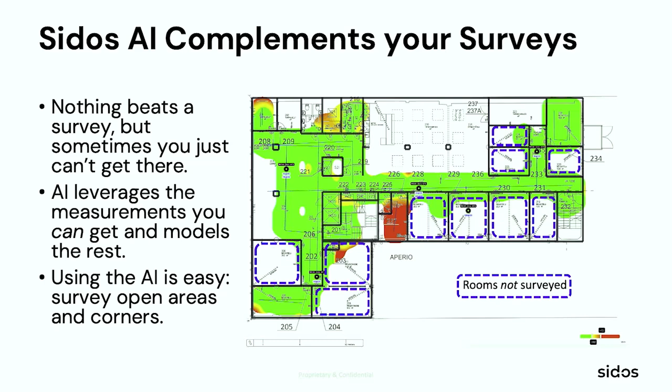So what I can do then, I run the Sidos AI on this, and this is what we'll get. So Sidos AI, it builds a digital model, and this is a machine learning term, as you may know, but it fits the measurements that I actually managed to get into this model. And once we have a model that we think is good enough, then we use that to estimate the rest.

And because this is not smoke and mirrors, what you could do, and it looks good, is just take the colorful heat maps and do blending and shading and stuff, but that doesn't match the real world. But what we do with Sidos AI is that we actually build a 3D model with real laws of physics, and then we use that to generate the heat maps.

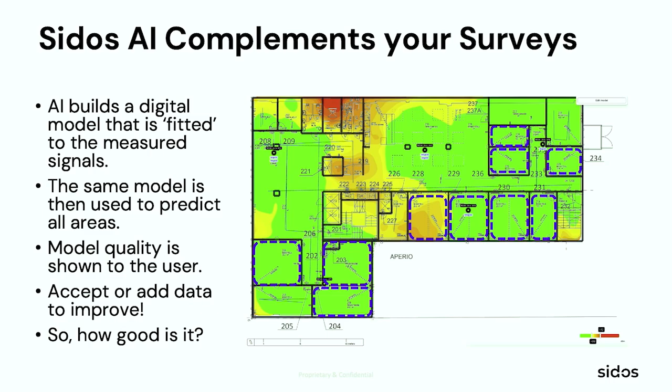And because we do that, it's more than colors. We give you a numeric metric, how good the model is. And you can look at that metric and decide for yourself if the model is good enough for your purposes. If it is, you move forward, you're done. Or if it's not, what you can do is you survey a little more. You give the AI more information, more data to work on, and the model gets better and better. So you can always give it a little more, okay?

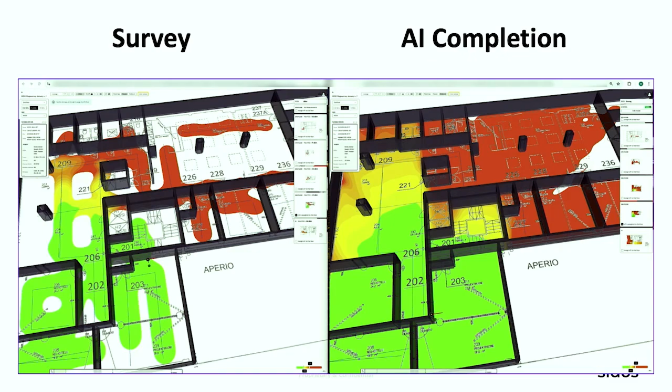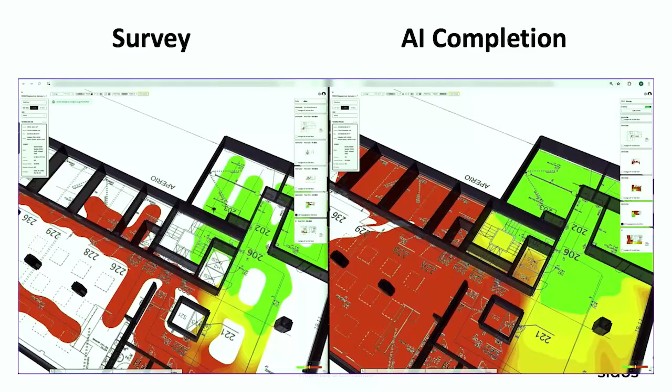Here's another view to it. So I selected one AP, and on the left, you see the full survey, and on the right, you see the AI completed survey. And colors match as they should if the model is good, like in this case it is. But the one on the right actually looks better. It's more representable. I could give it to my customer, and I surveyed much less. I did not enter those 10 rooms on the one on the right.

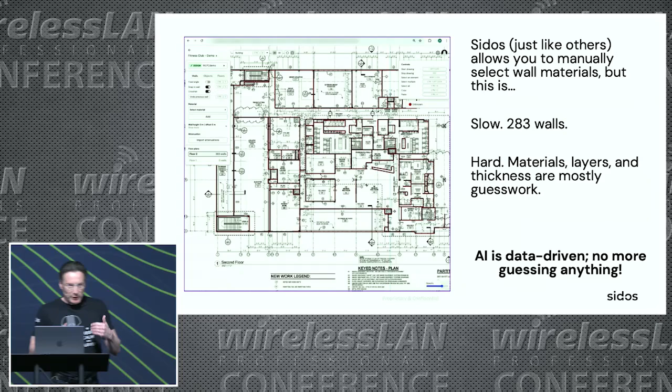What the AI can also do, because we have this model, is that it can improve your predictive designs by a lot. Okay? Let me show you this. So this is a Sidos predictive planner, and now the AI has configured the walls for me. So we do, just like everybody else in the tools industry, allow you to select the wall materials from a list. You can say, hey, this is drywall, cinder block, wood, glass, whatever.

But a couple things. One, there's 283 walls here, so I'm a little lazy. I wouldn't want to go select them one by one. And the other thing is, it's very difficult to do.

I can look at the wall, and I can tell it's probably drywall, but I don't know if it's one layer, two layers, is there something in between? So rather than manually selecting the materials, I just run the AI on it. And here's the list of materials if you wanted to select manually, but it's so much faster just to run the AI on this. So I've done a survey in this building, I just run it, and now we're done.

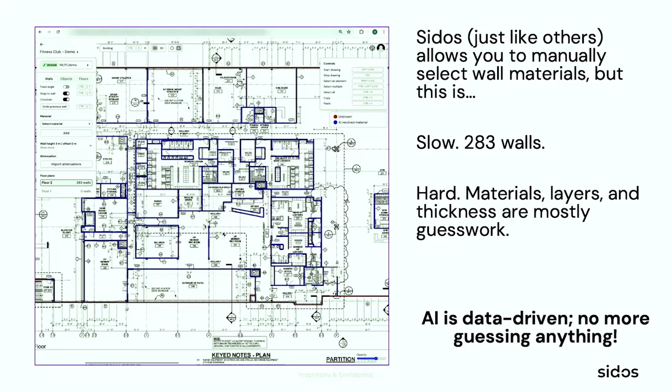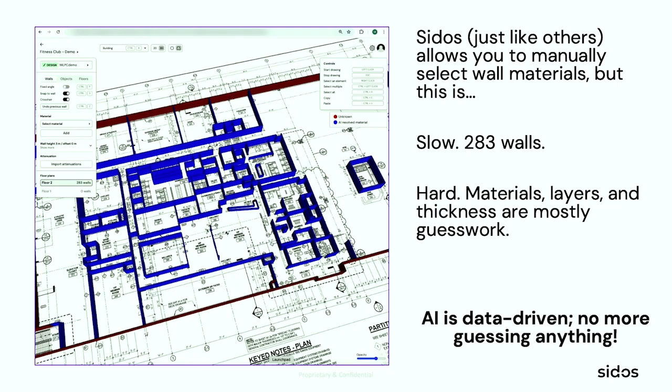So anything that you see as blue has now been configured by the AI. And it's not like all blue walls are the same material, but every single wall segment now has an AI-resolved attenuation for it. And because there's no guesswork, it's all data-driven, this is very accurate. Well, how accurate? Let's see. So this is the planner. Walls have been figured out by the AI.

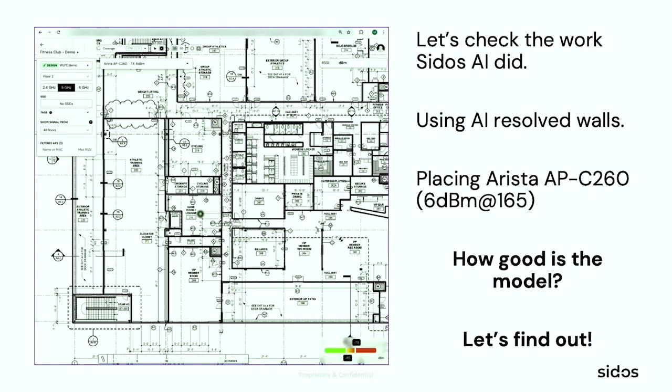Let me just place one AP in there. So in this case, it's going to be an Arista AP, and I set it at 6 dBm and drop it into, I believe that's a game room. So once I placed it in there, set the power, set the channel to 165, and Sidos Predictive Planner shows me what the heat map looks like. And now the big question again is, how accurate is this now?

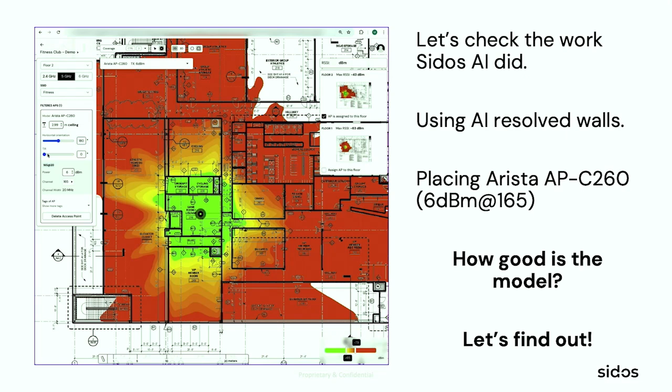And I'm sure, as you guessed, I went in there and it just happens that that AP with those settings is in there. So I just surveyed it for real, and now you can compare the two. Remember, the one on the left is completely predictive design. There is no survey information whatsoever. Only the walls have been figured out by the AI. From that point on, it's all predictive. As you can see, they're very, very close to each other.

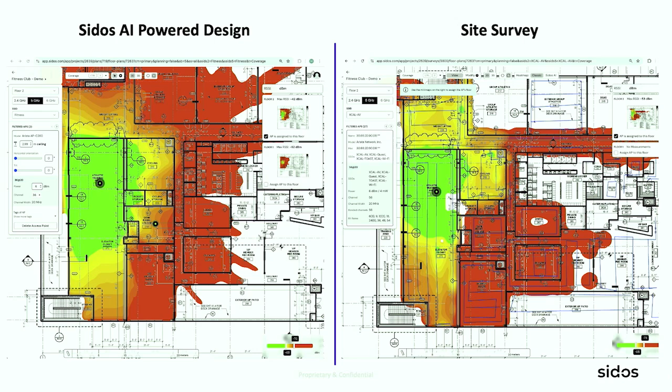Here's another AP, just a sample for you. They look very, very similar. They would not look the same if the AI didn't do a good job figuring out the wall materials. This can be very cool if you do upgrades. Survey with the existing network, use the AI to configure all the walls, and then you have a fresh, ready-made configured model where you can start dropping in your new network.

But the cool thing is that now if I want somebody else to do something for me, I give this to them and ask them to do it. I don't have to give them my phone or my laptop, and I don't have to ask them to use their own phone, give them credentials, usernames, passwords, install apps, get cables. I just hand this over, and once the person takes it, the handover is done. And it's super easy to use.